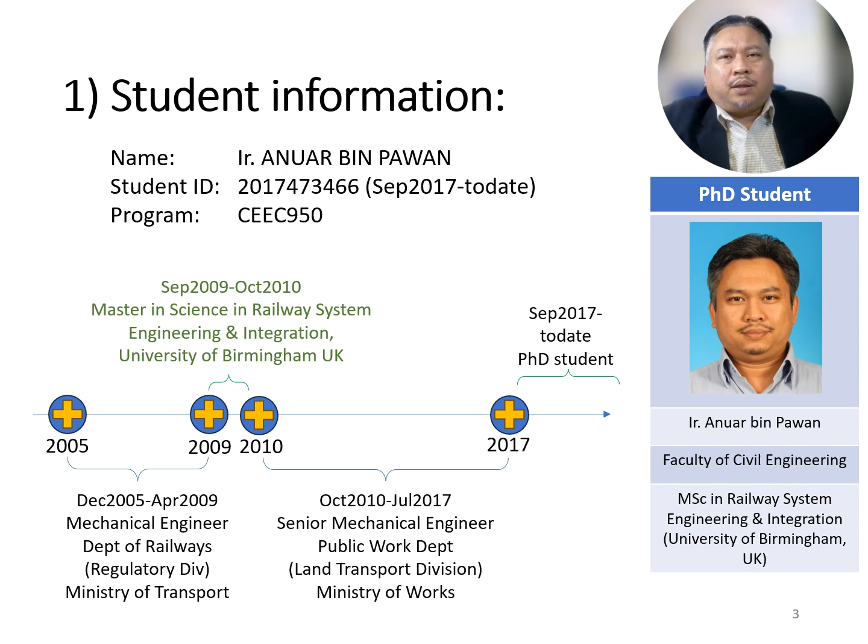Once completed my master degree, I returned to public work department as a senior mechanical engineer, posting in land transport division under Ministry of Work. The work and the role and responsibility is much more on overviewing the railway project in public works department.

My research main supervisor is Engineer Technologist Dr. Anizahyati binti Alisibramulisi, senior lecturer in Faculty of Civil Engineering, supported with two co-supervisors, Professor Madya Technologist Dr. Zuraidah binti Salleh from Faculty of Mechanical Engineering, and Technologist Dr. Hajjah Norliyati binti Mohd Amin, Senior Lecturer in Faculty of Civil Engineering, UiTM Shah Alam.

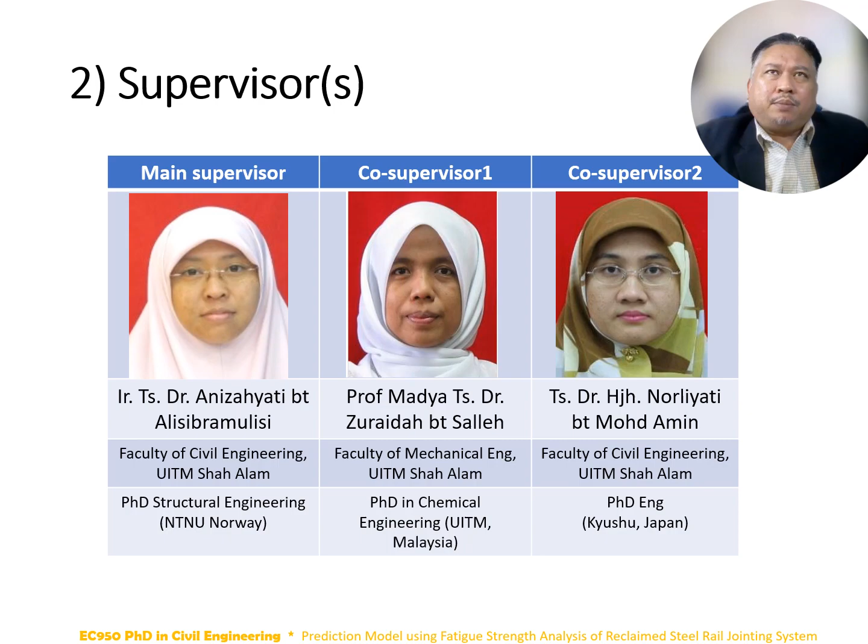My research title is Prediction Model Using Fatigue Strength Analysis of Reclaimed Steel Rail Jointing System. The title has 5 underlined words, which is prediction model, defined as a process of using known results to create, process, and validate a model that can be used to forecast future outcomes.

Fatigue strength analysis, which is the fatigue limit, is the number of cycles of stress of a specific character that a specimen or material can withstand before failure. Reclaim also means a retrieve or recovered material that has been used subject to assessment. In this case, either it is still serviceable or at the end of its service life.

A steel rail is a pair of parallel bars made of iron alloy laid on prepared track or roadways, etc. It serves as a guide and running surface for the railway wheels. Jointing system is a splice connecting the adjacent ends of the rail.

So in short, the title is about predictive models that analyze past or known performance to assess railway joints exhibiting specific behavior to prevent rail breakage in the future.

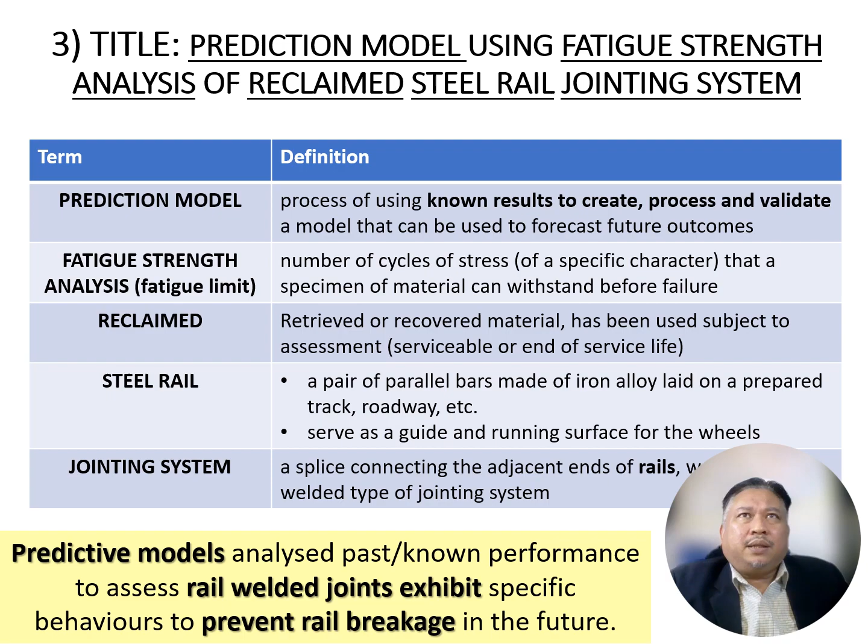I am now proceeding with the introduction to the study. Railway systems worldwide have been instrumental in facilitating passenger trips and transporting millions of ton-kilometers of cargo. A critical component of this railway system is the steel rail, which plays a vital role in securely transferring vertical loads to the ground while enduring rigorous rail-wheel interactions.

In the diagram on the left, you observe that the train with a load of 200 kilonewton, or 20-ton axle load, transferred to a vertical load of 100 kilonewton at each wheel. This load is then further transferred to the rail over a small contact patch.

This contact patch is about the size of 1 centimeter squared. Consequently, the mean stress experienced by the rail is about 100 kilonewton per centimeter squared, which is equivalent to an outstanding pressure of 10,000 bars. The remaining portion of the load is subsequently transferred to the rail pad, base plate, to the sleeper, to the ballast bed, and further to the substructures.

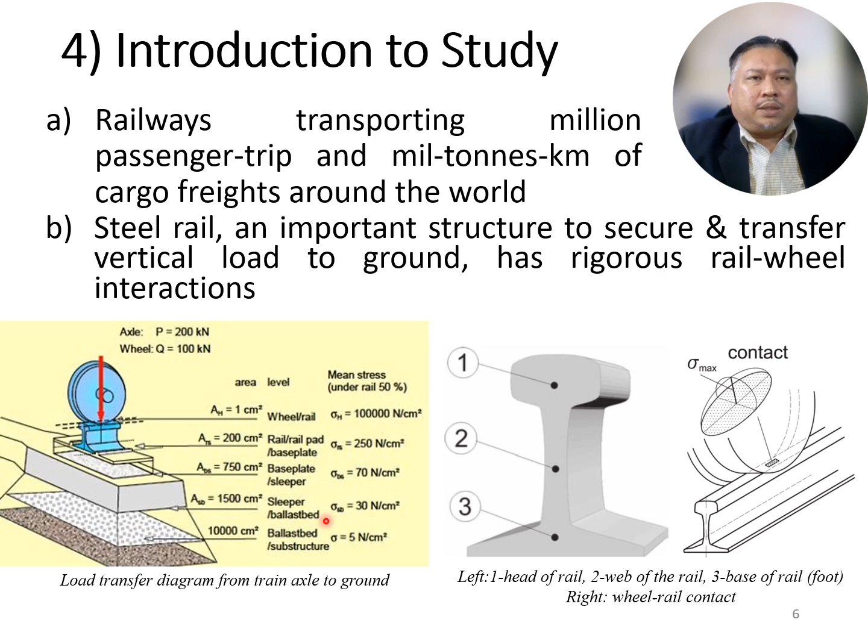From its rigorous working conditions, some rails are used until their end of service life. Some are recovered earlier due to line upgrades. For example, in Malaysia's Ipoh-Padang Besar single line upgrade, the track is about 330 km. The track had been utilized for operation less than 3 years. There are about 17,000 tons of metal or steel rail worth about 54 million.

It's going to be reused for another project - the Klang Valley Double Track route, from KL Station to Klang, Salak South to Seremban, and Simpang to Port Klang, about 260 kilometers double track. It operated in 1995 and was being rehabilitated in 2016, only after 22 years of operation.

There is no clear decision either the steel rail are going to be reused or going to be recycled as scrap. So what are the main decisions? Either we can reuse the rail or we should recycle the rails.

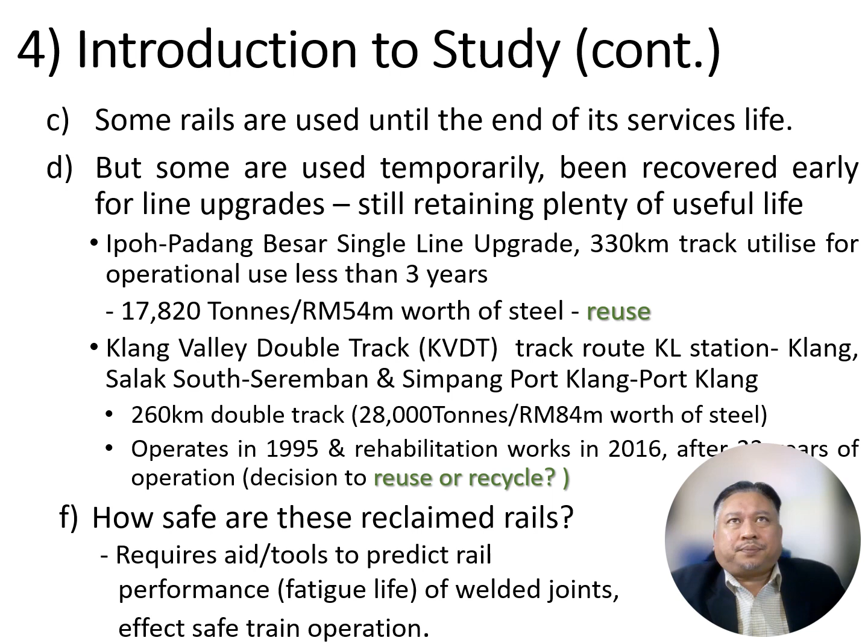I am now going to explain about the major research milestone. There are 7 major items in this milestone. The first 3 - problem statement, objective, and scope of studies - already agreed upon, and there will be no changes.

Item 4 to 7, literature review, is going to be work in progress, ongoing for data analysis to include CDM, continuum damage mechanics, and prediction modeling. The research methodology is also being revised, omitting some area of modal analysis, and data collection is also being revised to include actual train load data, and data analysis also ongoing for input and revised numerical analysis modeling.

Item 6 is about the timeline. Item 7 is status of publication. Item 8 is status of thesis writing, and item 9 is planning for the next semester.

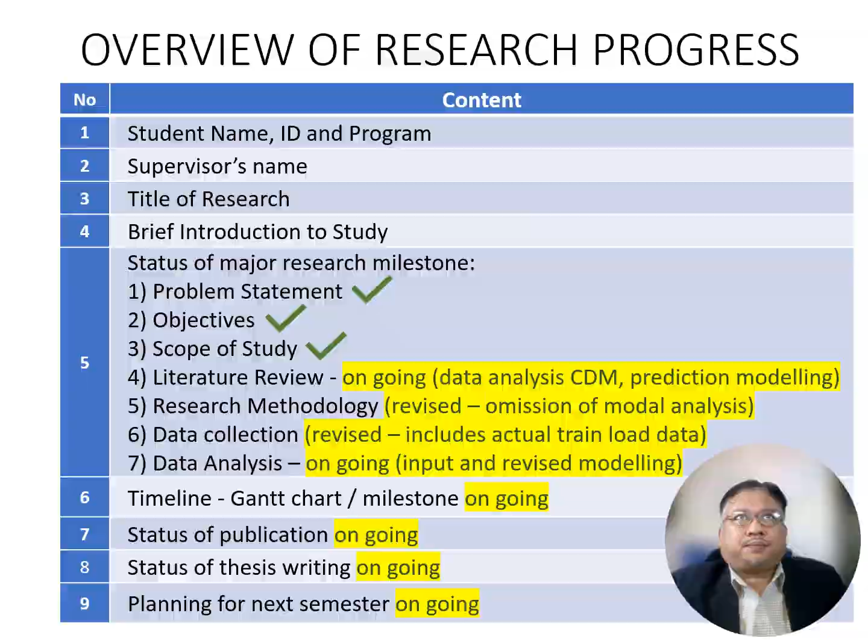The issue that initiates this research is the use of reclaimed rails in railway track material, whether the rails are still serviceable or not.

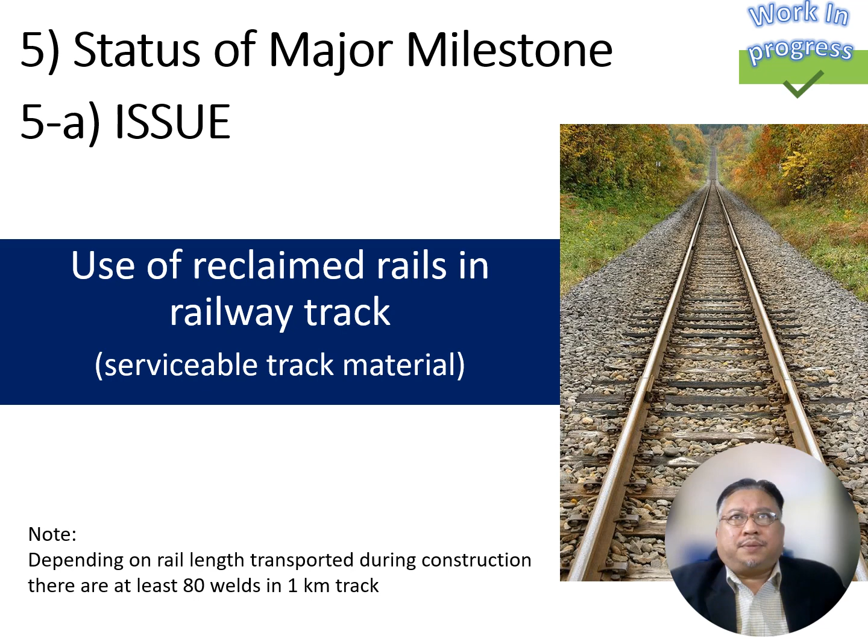The issue of reclaimed rails becomes a problem when these rails are discarded, perceived as high risk due to unknown conditions and low safety performance. It has been discarded as recycled scrap material.

However, these reclaimed rails in Switzerland have been reused in more than 30% of its track materials after thorough assessment, as it is serviceable. In Malaysia's case, before our project for Ipoh-Padang Besar begins, the Ministry of Transport already donated our rails for the Singapore-Kunming lines.

In regards to the welded joint in reclaimed rails, it has been a practice to cut and replace with a new weld. This is considered a wastage of 2 to 5% material, and requires additional welding process to rejoin the cut rail.

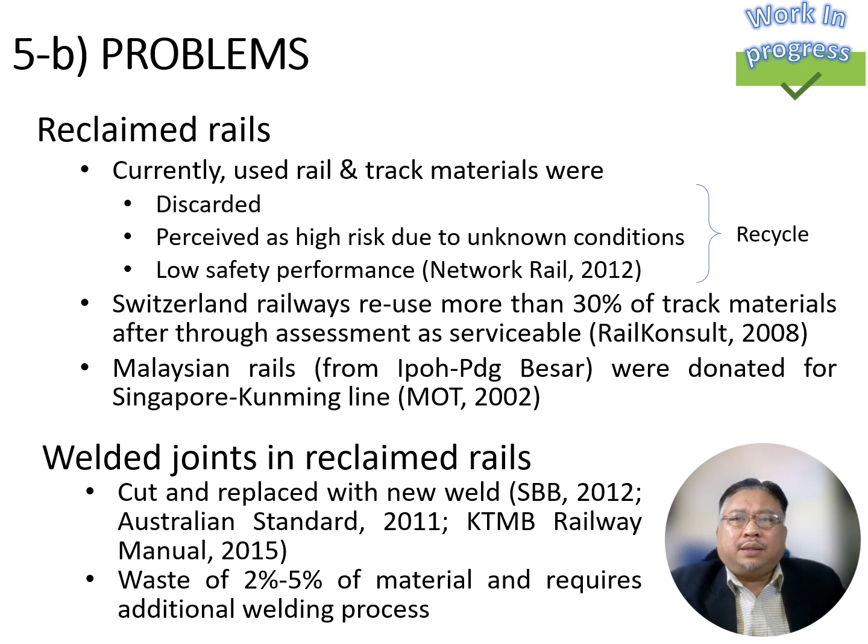So there is an escalating problem statement around the industry: rail weld or rail joint defects are a main contributor to rail accidents. Secondly, welded rail defects are difficult to identify. Thirdly, there will be an abundance of rail.

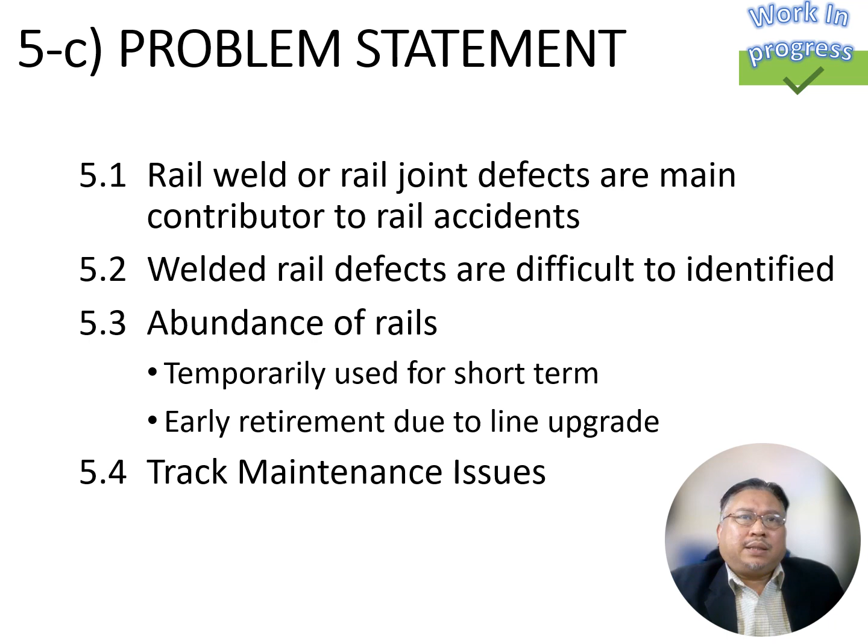Temporary rails have been used in the short term due to line upgrades, and there are also problems with track maintenance. It is a problem for the industry to determine rail defects such as weld joints.

Liu, in his study about U.S. rail derailment in the United States from 2000 to 2010, came out with statistical data showing broken rail or weld occurred 13 times, 50% more than the average of 8.6.

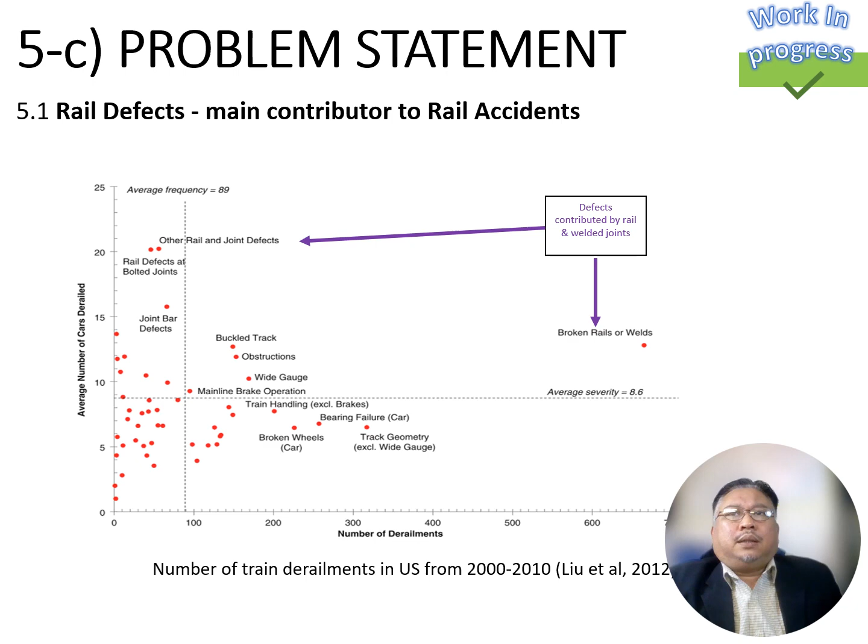Welded rail defects are also difficult to identify. The industry has agreed that crack growth in the web and crack initiated in the head are very difficult to identify, requiring several transducers at different angles to identify their presence.

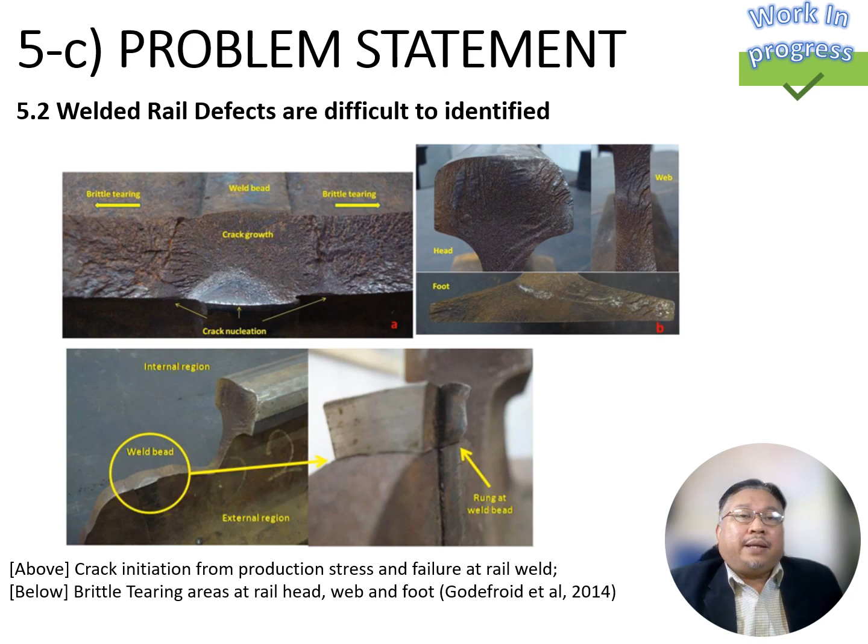This is a very slow process and requires highly skilled workers. If the cracks are not identified or the weld is not removed from the surface, the internal crack region will propagate and extend until it reaches an uncontrollable size, eventually causing the rail to break.

There is also a problem with the number of rails that have been used and retired earlier than their intended design life. For example, in earlier railways of the 19th and 20th centuries in most parts of the world, the axle load for trains was about 10 to 20 tons per axle.

Only after 2010, most regions increased their loading capacity, now maximum in the United States at about 42.5 tons per axle load.

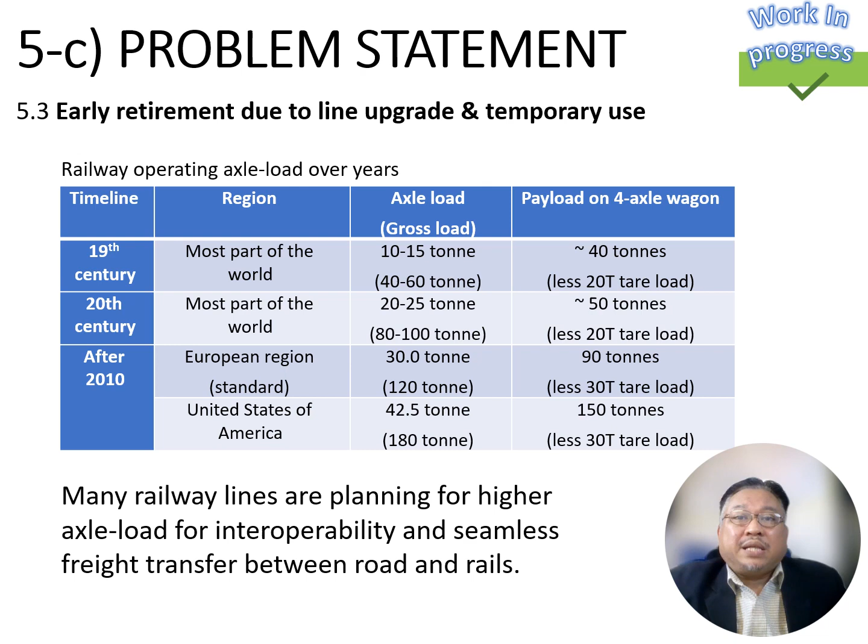Therefore, rails still in service but unable to cater for higher carrying capacity will be removed from the line and will be part of the wastage if not treated as part of the serviceable rail.

To identify defects in welded rail also requires a major undertaking and commitment, and becomes a track maintenance issue for many railway operations.

It requires a full range of skilled workers, fully functional machines, and high capacity machines. Even adequate stock and forecasting for reordering will take time.

In terms of operation, the rail needs to be resurfaced or reground to minimize the formation of surface cracks, and this is very important to remove the surface crack before it reaches its critical size.

For internal crack inspection, this also requires ultrasonic inspection as mentioned earlier, where it requires 70 degree transducers, 40 degree transducers, and 0 degree transducers. These transducers will inspect and provide an assessment report of the condition.

But at this moment, the current high performance machine operates at only 30 to 70 kilometers per hour, and with passenger trains running at 120 kilometers per hour, this inspection train will be delayed and will mostly operate during night time. Therefore, it is very important to have supporting tools to predict rail performance based on predetermined fatigue life or service load conditions to ensure safe train operation.

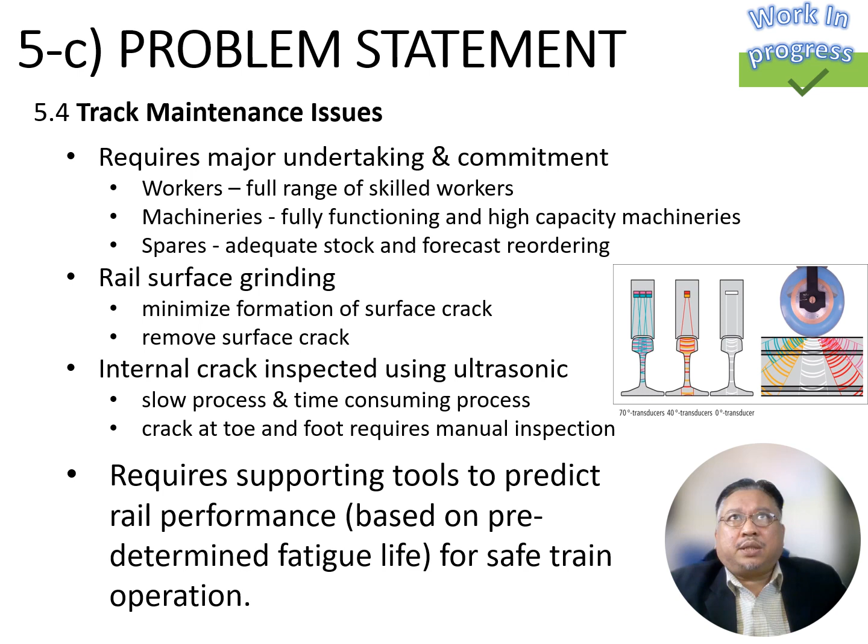This study has five major objectives. First, to analyze the fatigue stress of steel rail joints, and then to determine the fatigue life of reclaimed steel rail joints, and then the research should be able to establish the relationship between fatigue life at rail joints.

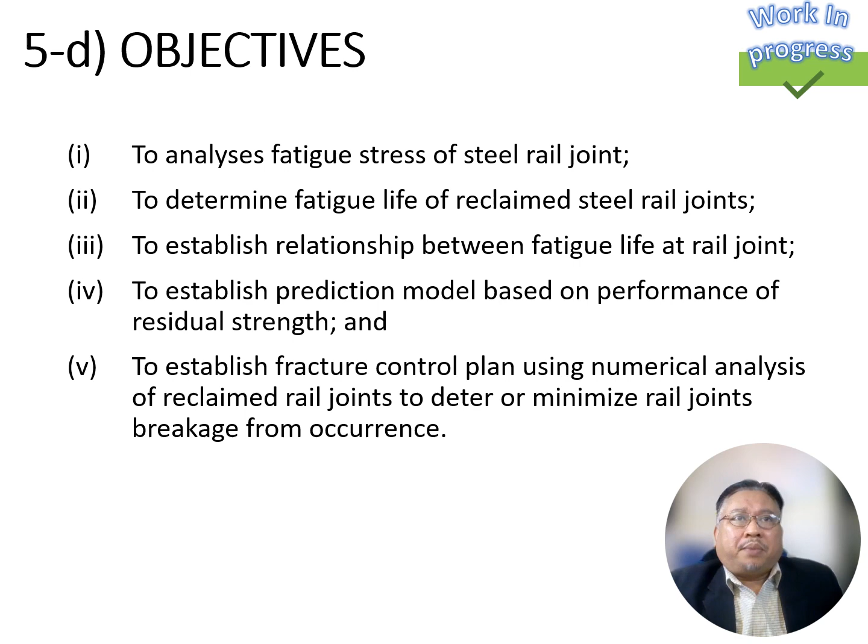Basically to compare between the base parent material and then to establish a prediction model based on performance of residual strength. And finally, to establish a fracture control plan using numerical analysis of reclaimed rail joints to deter or minimize rail joint breakage from occurring.

For the scope of study, the first step is to perform experimental investigation on welded joints. This is to determine the mechanical properties by analyzing chemical analysis and surface analysis, checking whether the right composition is in place for the material.

Then the author will perform mechanical testing on bending tests and fatigue life cycle performance on the parent rail and the welded rail. Secondly...

The second scope is to analyze crack initiation and propagation using scanning electron microscopy. Then the study will assess the welded joint strength based on microscopic analysis and empirical formula for trends in fatigue failure. The fourth scope is to develop numerical modeling of residual strength and further validate it with experimental data.

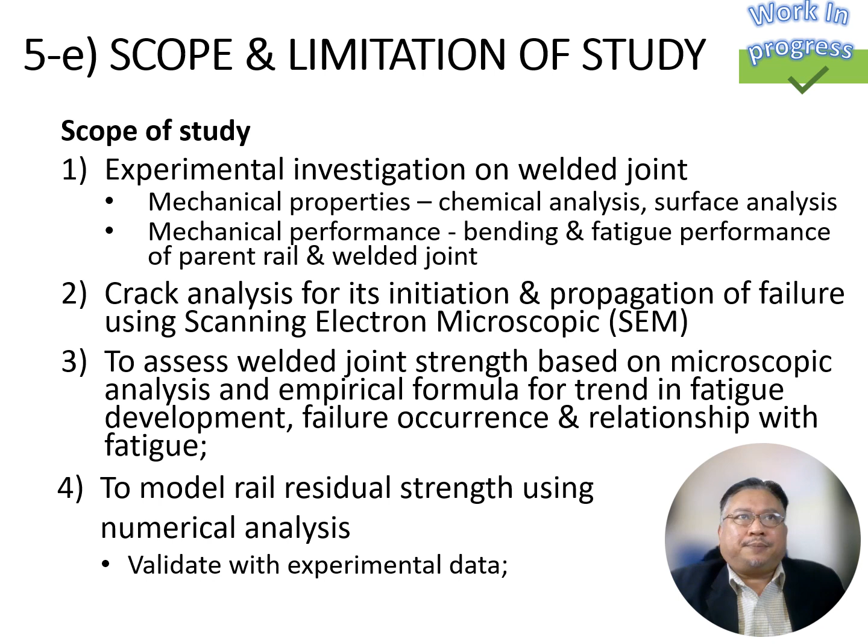The final scope of study is to establish a fracture control plan for rail operation throughout the rail's life cycle, aiming to minimize weld failure. This forecast will utilize actual train load data from dynamic train loading obtained from various sites. However, the study faces certain limitations. Firstly, the research has restricted numbers of samples, emphasizing the need for precise and accurate specimens to ensure consistency

and repeatability of the experiment. Secondly, there is a scarcity of laboratories capable of conducting the required EN 14587 tests. In most cases, the service charges of these tests are relatively expensive due to the extended duration and monitoring requirements. One sample for

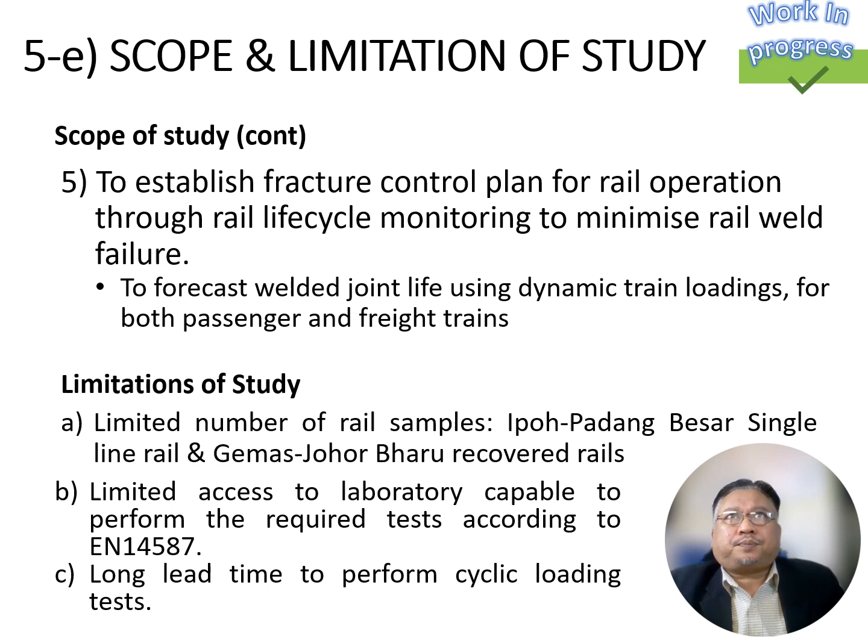5 million cycles will take around 1 month, and this is quite a time-consuming process. In the literature review, there are many references relating to the defects of welded rail and surface crack initiation. Farhangi and Mousavizadeh 2007 concluded that even though flash butt weld is superior in quality compared to aluminothermal welding, the flash butt weld still has failure issues due to horizontal split web. According to Saarna and Lansoo, even though the flash butt weld failure rate is low at 7.9%, most studies found that delaying surface crack removal will cause the crack to propagate and continue to cause rail break.

Ekberg and Kabo, in an experimental review, observed subsurface initiated rolling contact from high dynamic contact forces, pressures, and material defects, both in wheels and rails, often happening at welds. The slow growing defect, however, occurs at the foot and web of the rail.

Popovic et al. 2014 emphasized the trend in uncontrolled rail defects, which can threaten traffic density safety, increase rail maintenance, and lead to premature removal of rail, or can cause complete rail failure.

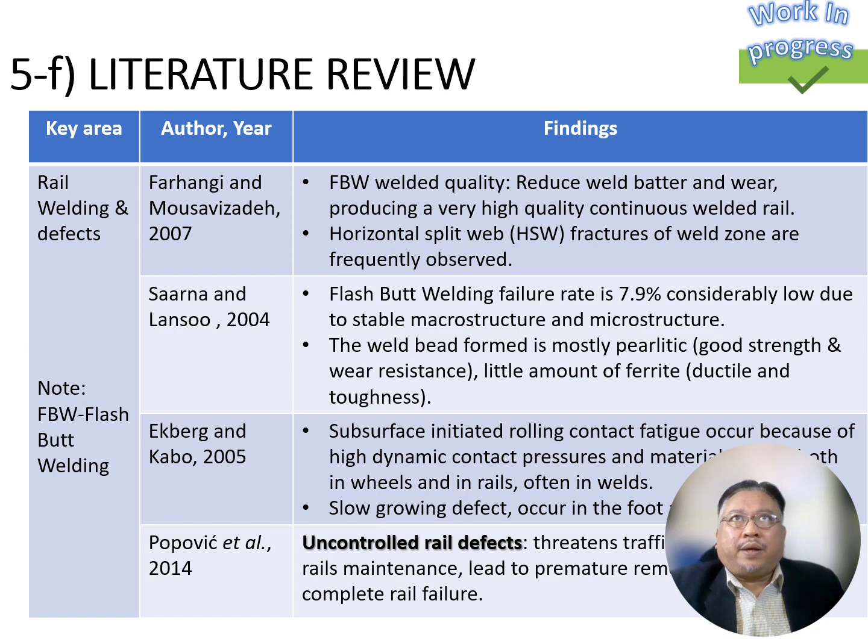Veskovic 2012 outlined that surface cracks happen during rolling contact fatigue and plastic flow due to high stress at a small surface area, which is the contact patch.

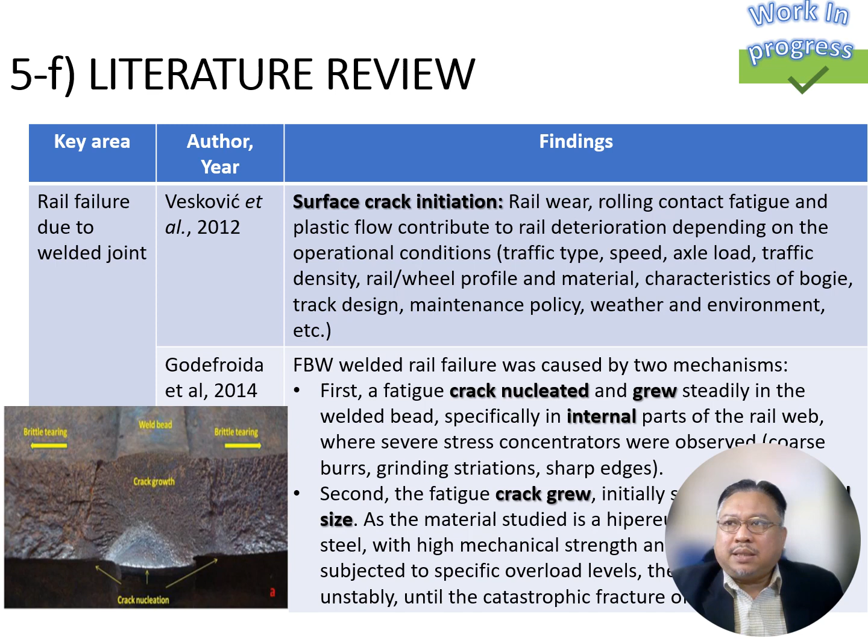Furthermore, operation-induced factors such as train speed, axle load, traffic density, and maintenance regime play an important role in the propagation of cracks. According to Godefroida 2014, cracks in weld nucleate in the weld bead, specifically at the rail web, then grow to critical size. Continuous loading at this stage will promote existing cracks to grow unstably, which leads to rail break.

There is also supporting literature about reuse of reclaimed rails. Brinckerhoff 2012 stated that reclaimed rails can be used as relay rail inserts and closures.

AREMA, the American Railway Engineering and Maintenance of Way Association, in their track manual 2006, emphasized that reuse of rail must follow its rail standards. The rail dismantled from track must be used in accordance with its previous function. For example, straight track rail must be used at straight track, and curve rail from the higher side or low side must be used at a similar location.

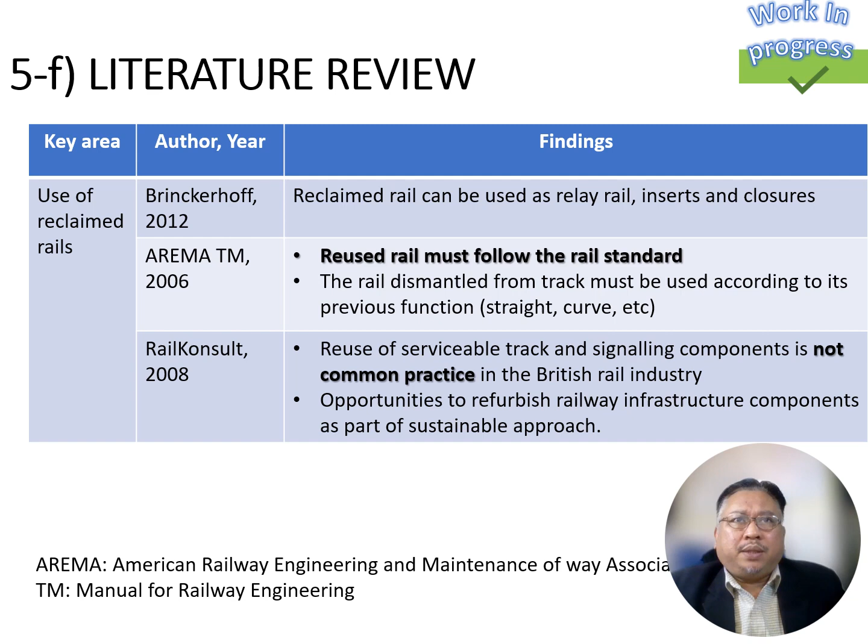RailKonsult in 2008, in their study observation, concluded that reuse of serviceable track and signaling components is not a common practice in British Rail. There are also opportunities to refurbish railway infrastructure components as part of a sustainable approach.

The author has extended additional literature on prediction technique. Miner, 1945, analysis shows lack of dependence from the loading and specimen geometry. Fatigue life is determined only by stress-strain criterion.

Ayoub et al. 2010 and Suresh 1991 use the rules of linear cumulative damage from Palmgren and Miner, but then it must be included with continuum damage mechanics, where the fatigue life is predicted using a damage parameter cycle by cycle, and continuum damage mechanics includes the accumulative damages from the very beginning until the end, which is value added to the linear cumulative damage.

Bhattacharya et al. 1999 agrees with continuum damage mechanics because damage initiation and accumulation in material are important to be part of the damage formulation before detectable defects happen at the microstructure level. CDM includes damage initiation and accumulation in material prior to the formation of detectable defects.

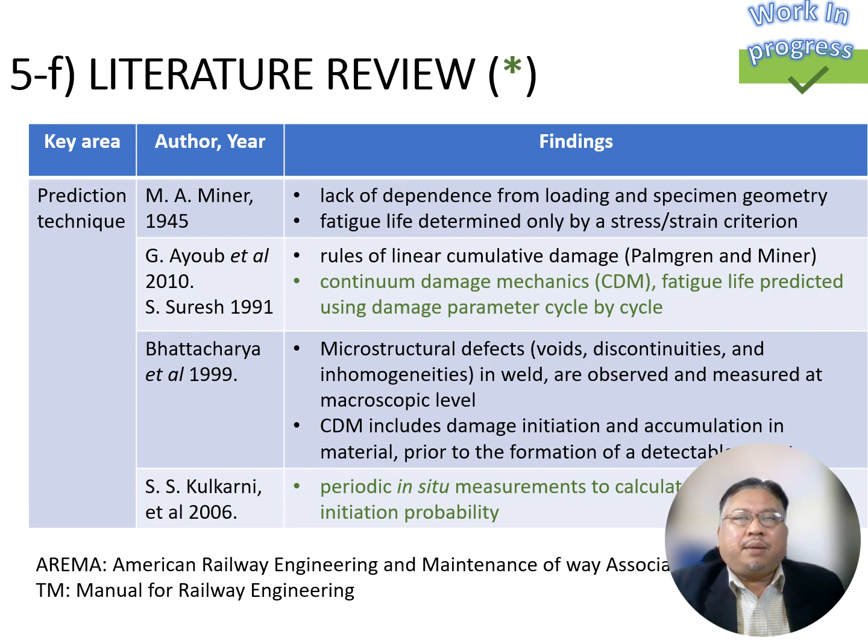As for prediction technique, T. Dahlberg 2003 suggested including multi-axial loading, tensile and bending. S. Nair 1985, also from his experimental observation review, found that the rail head experiences lateral and vertical deflection including rotation due to loads from passing trains.

U. Zerbst et al. 2009 outlined three different forces acting on the rail: longitudinal, vertical, and lateral, with bending moment due to lateral force, maximum occurring at the midway of sleeper distance.

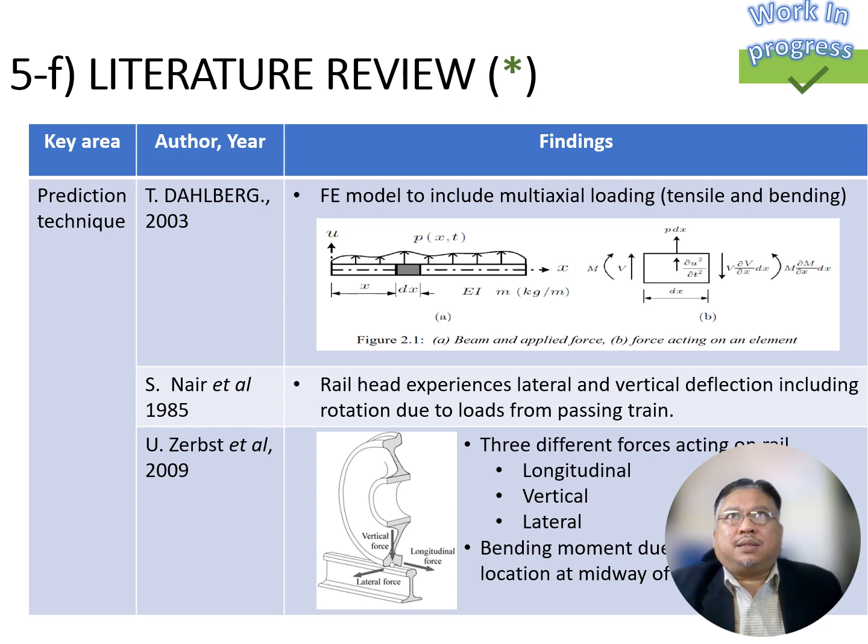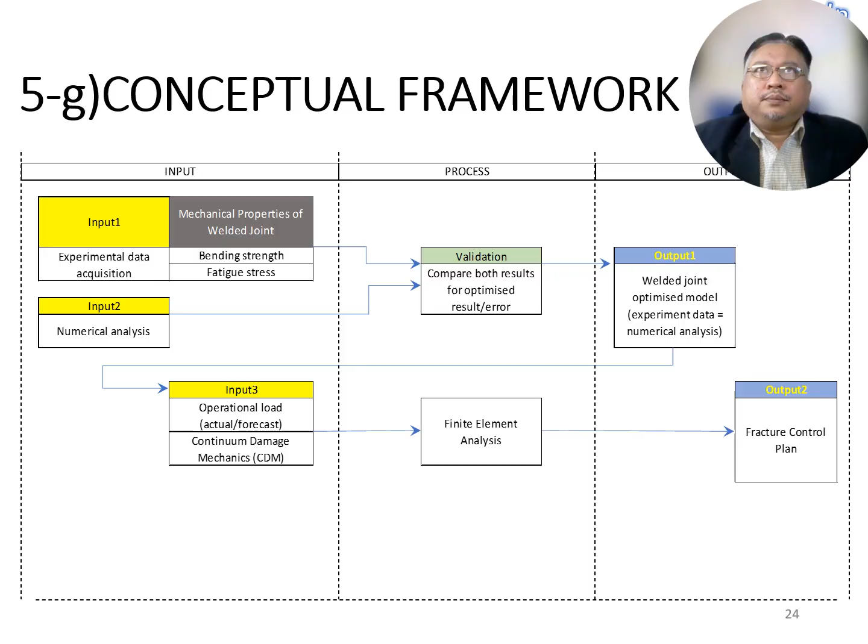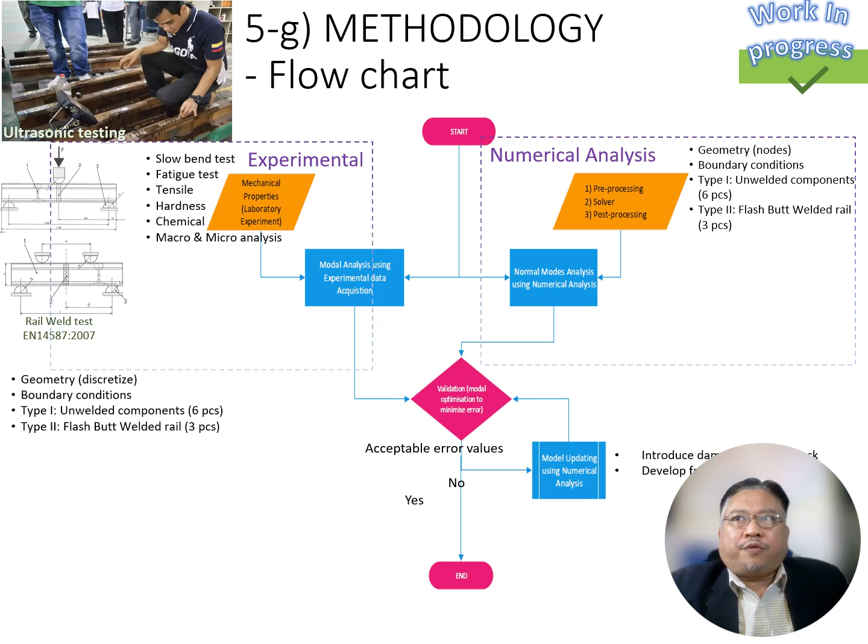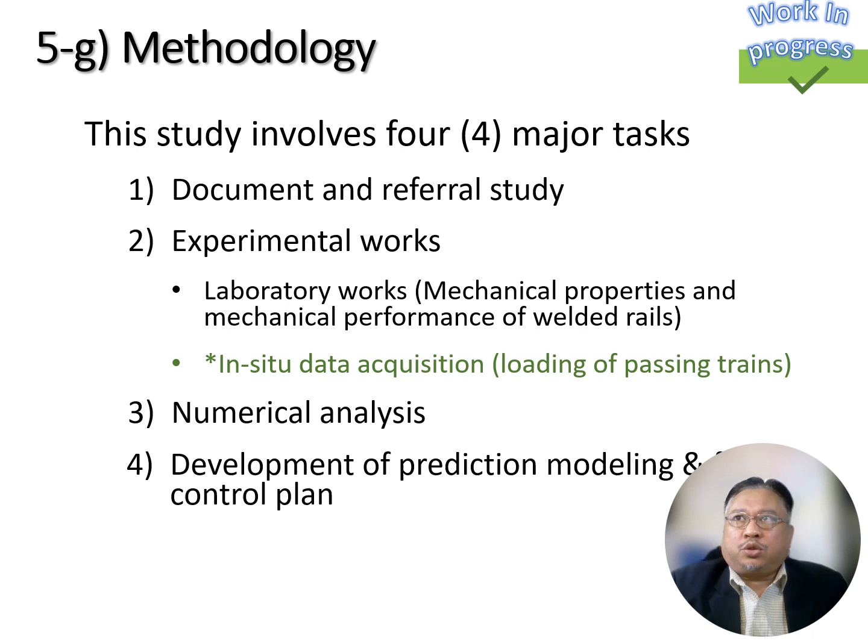For task number one, document and referral study, the author will review previous studies and perform gap analysis, perform a pilot test on slow bending test to determine suitable machineries available to perform the test, and then model the initial finite element analysis.

Then the author will analyze the welding process at site. In this case, there is Mentakap and Kemayan yard for flash butt welding, and Mentakap-Gemas-Mentakap site installation.

Thirdly, the author will review the recovered material usage history. There are records on how long the rail has been used, how many trains have used the track, etc.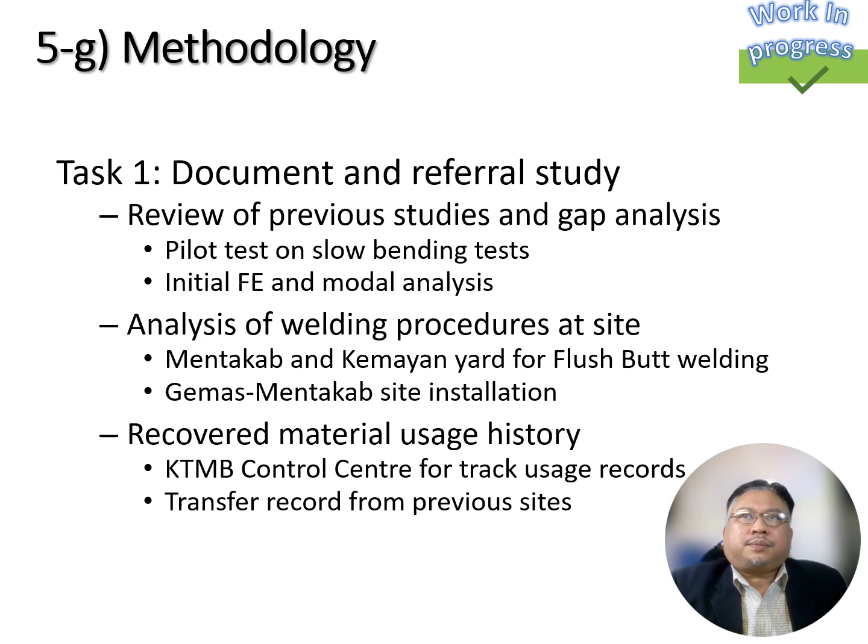Task number two is to perform laboratory works on mechanical properties of the welded rails. There is a bending test - 3-point bending will be performed at Heavy Structure Lab, Faculty of Civil Engineering. There is also a rail weld fatigue test.

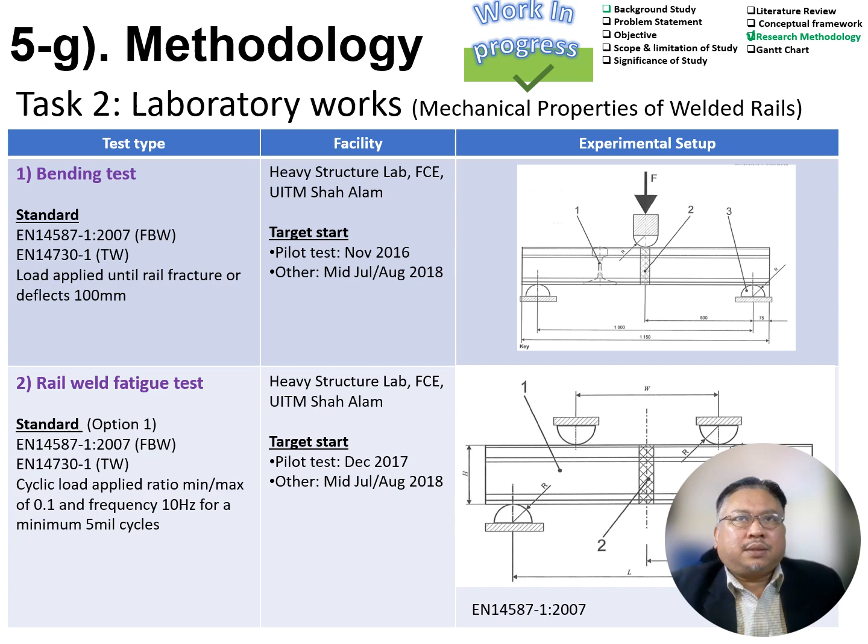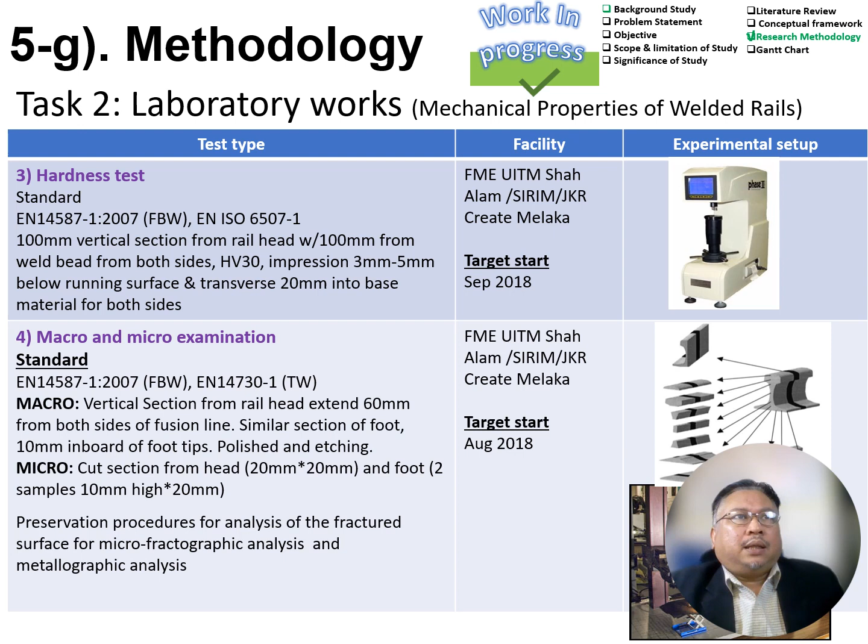We are going to perform the hardness test at Faculty of Mechanical Engineering. Macro and microstructure tests will also be done at Faculty of Mechanical Engineering. Chemical composition analysis will be done either at the Faculty of Chemical Engineering or UniKL - we have collaboration with UniKL where we share samples and use their analysis for this purpose.

Number 6 is a tensile pull test. This is done to verify the ultimate tensile strength.

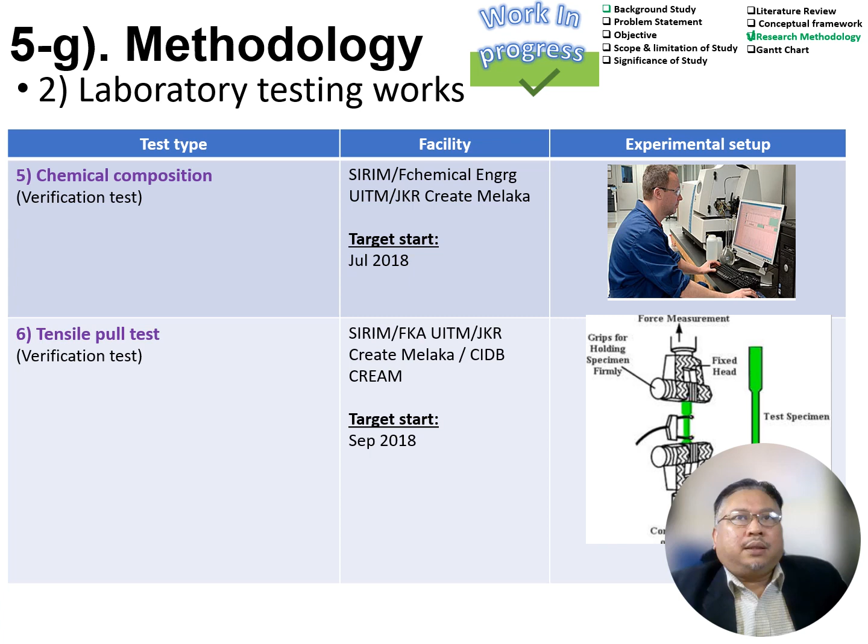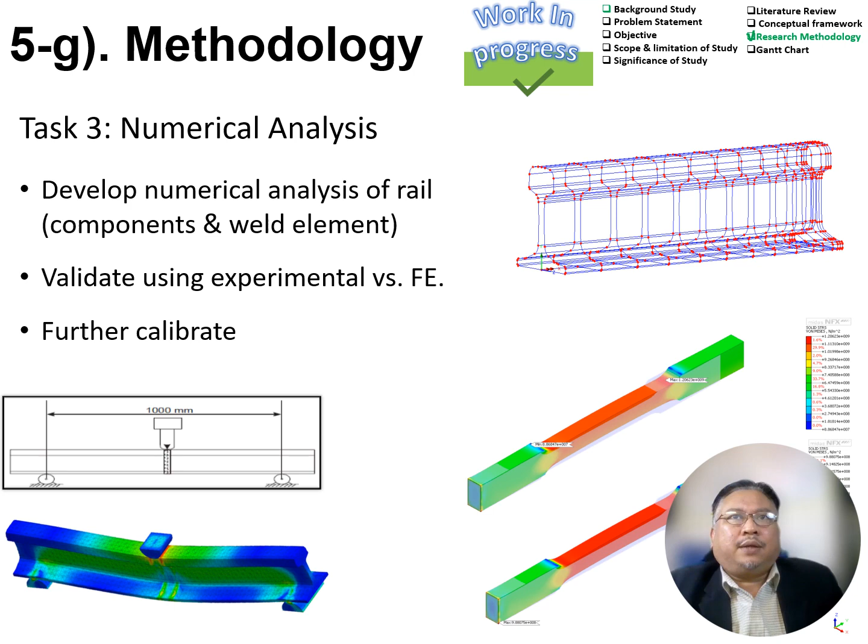Thirdly, we are also going to convert all the data from the actual rail profile into a numerical analysis model, and then validate against the experimental data, and further calibrate to ensure the error is minimized.

Finally, task number 4, the author will come up with predictive models and a control plan, to include load from actual trains passing the track, and then compare with the actual train schedule for operations.

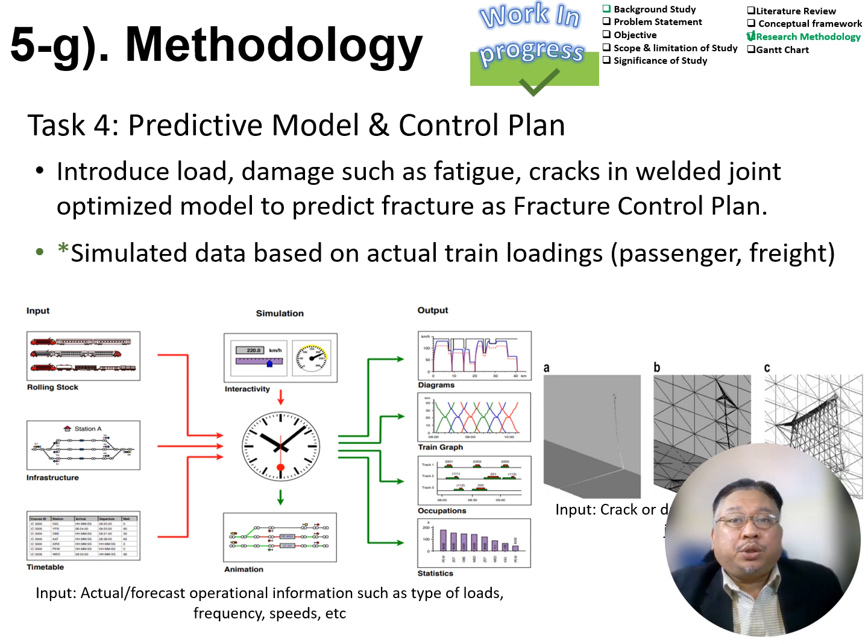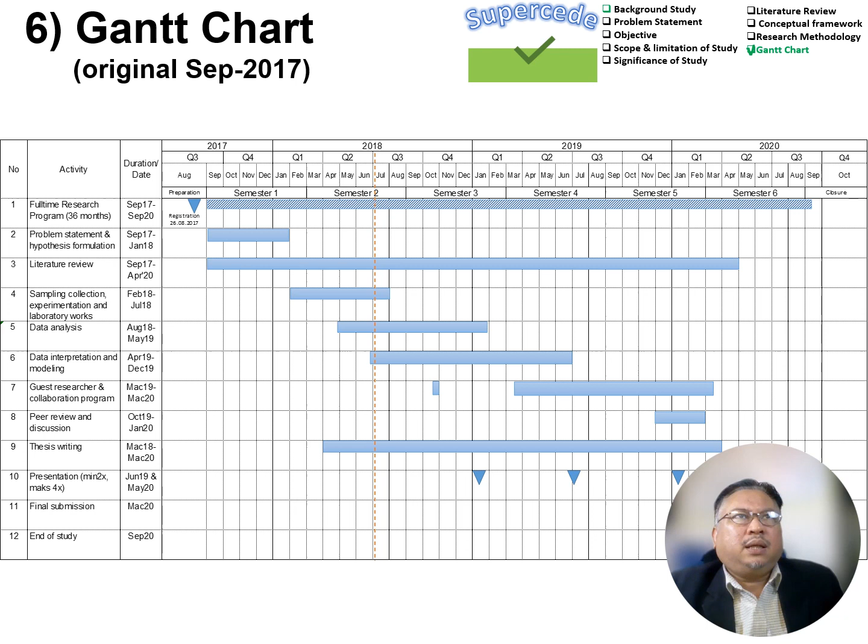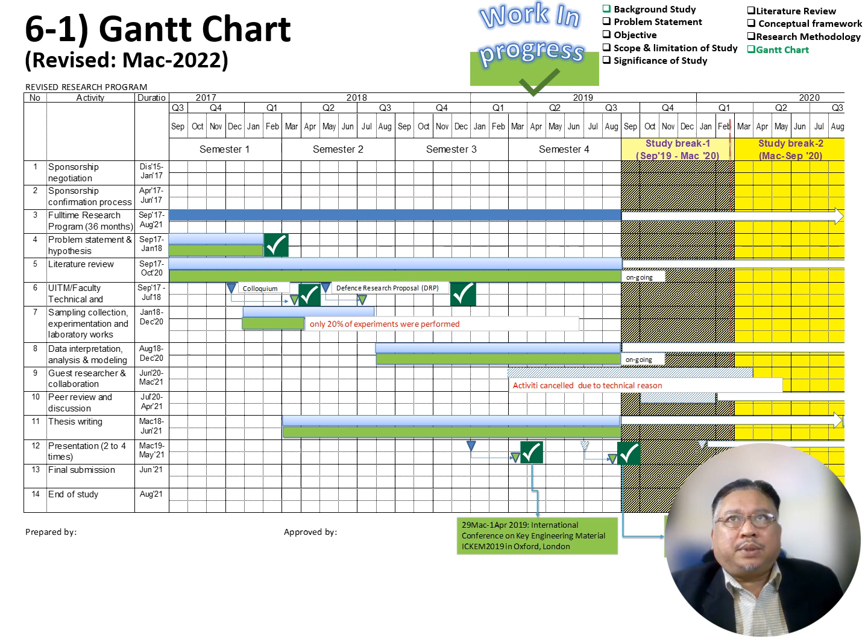Currently, I have three main tasks: literature review, data interpretation, and thesis writing ongoing.

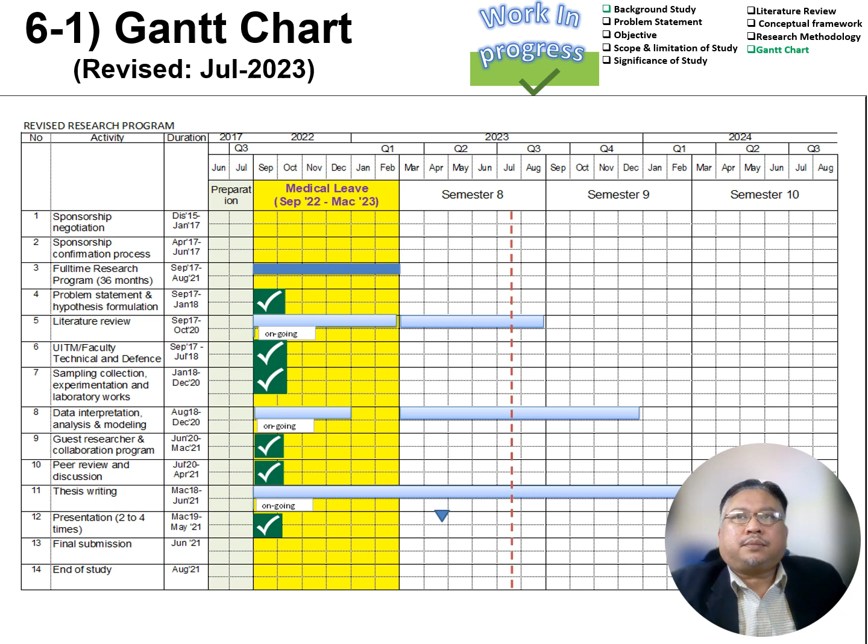Status of publication: there are already three publications - two in proceedings, one in a journal - and I'm currently still drafting on numerical modeling of welded joint under fatigue loads.

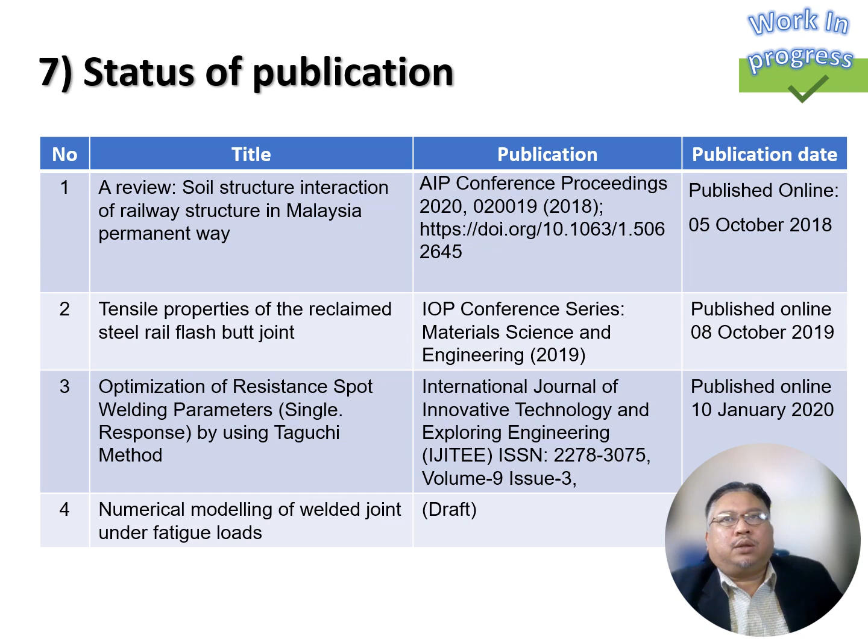Status of thesis writing: now in part 8, semester 8. Chapter 1, introduction, already completed. Chapter 2, literature review, has a revision on prediction technique, so it comes to 92%.

Methodology is about 90% because there is a revision on prediction modeling scenarios. Chapter 4, result and discussion, is about 78%.

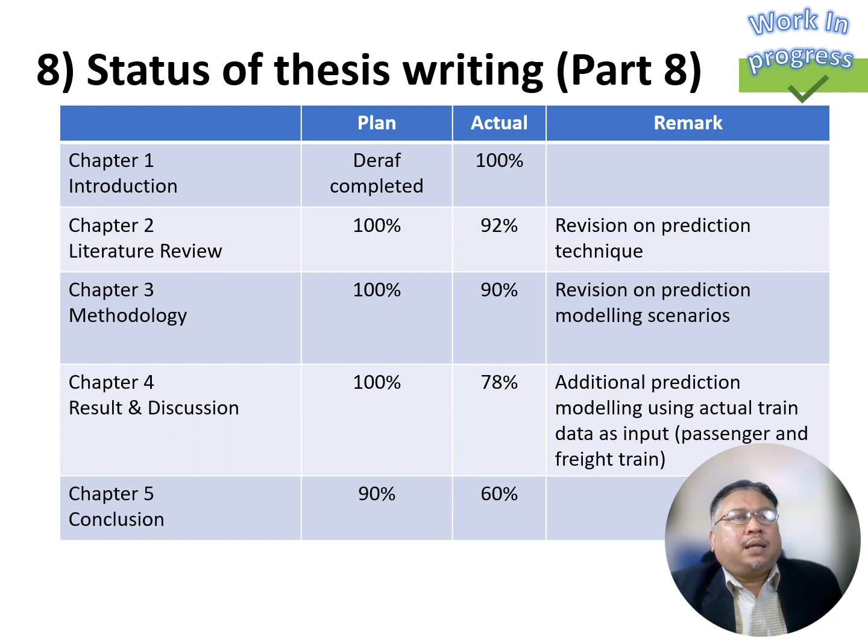Adding prediction modeling using actual train data as input for both passenger and freight trains. Finally, chapter 5, conclusion, is about 60%.

I am planning for next semester to complete chapter 2 and 3, and result and discussion will be improved towards 90% and 95% respectively.